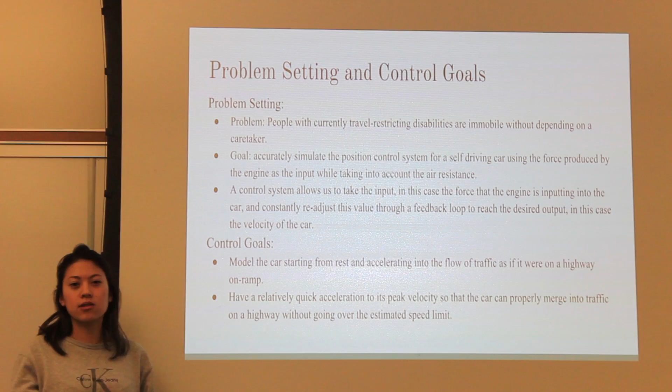So one of our main control goals, as I stated before, was being able to merge onto about highway speed, maybe even going a little bit faster. And so the model of the car, obviously, has to start from rest, because you're not just going to be jumping into a moving car, and it has to accelerate into the flow of traffic as well. So as if it were on a highway on-ramp, because we don't want it going too slow or too fast.

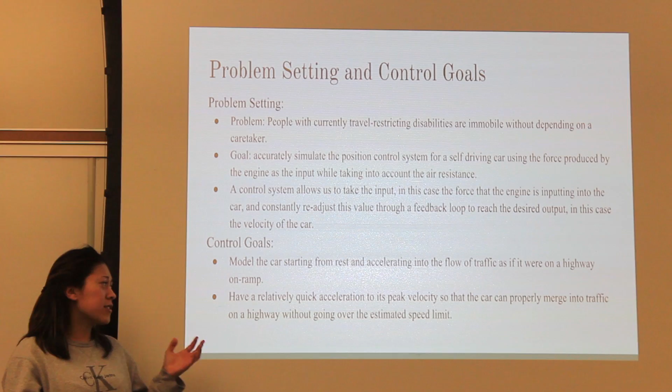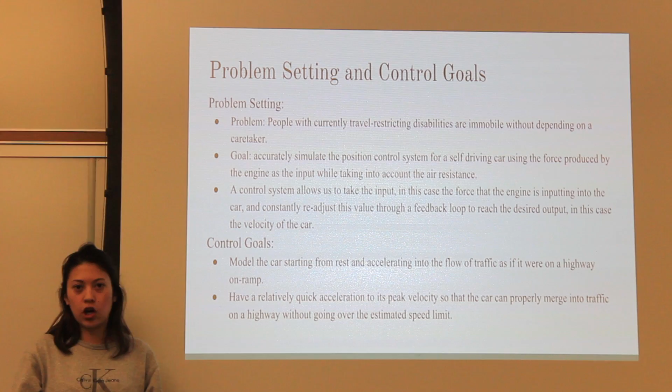We also want that relatively quick acceleration onto its peak velocity, but we don't want it to completely overshoot this velocity because we don't want someone to be in the car and completely out of control about what speed they're going at. So next, Charles is going to be talking about some of our model iterations.

Hi. So to begin our modeling, we took our vehicle and used an impedance network to model it. We ran it through a couple iterations. First iteration, we assumed mass of the vehicle to be 1,000 kilograms, a drag coefficient of 200, and an engine force of only 2,000 newtons.

We ran this through an iteration, and we found that the rise time, basically the time to get up to 60 miles an hour, was just way too slow. It was unsafe and not practical for a car accelerating onto a highway. So we had to go back, make another iteration, and change some of the values.

So what we did, we cut the weight of the car down to 800 kilograms. We made it more aerodynamic, which dropped the drag coefficient to 100, and we increased the power of the engine up to 3,500 newtons. We ran this through an iteration, and these design parameters were able to give us our desired rise time.

But to model the system, we used a transfer function modeling the output position over the input force, multiplied both sides by s in the frequency domain to convert that position to a velocity, which is our output goal. And we ended up with a plant G(s) of 3,500 over 100 plus 800s. And to describe the analysis on this and talk more in depth about the rise time will be Marcello.

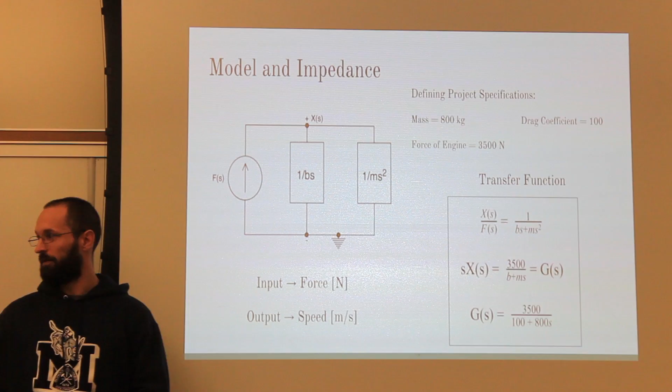So after taking that plant, we plotted the step response, and we found that the vehicle was able to reach a maximum velocity of around 78 miles per hour, which is reasonable. And it reaches our 0 to 60 goal in about 11.5 seconds, which is reasonable given other current models on the market. If you look at a 2012 Toyota Prius, its pickup speed from 0 to 60 is roughly 10 seconds. So we're doing pretty good there.

After this passed the verification stage of, okay, this plant is going to work for what we want to do, we looked to make sure that this plant was stable. And it turns out this only has one open loop pole, and it's in the negative 1/8, which is in the left half plane, making it stable.

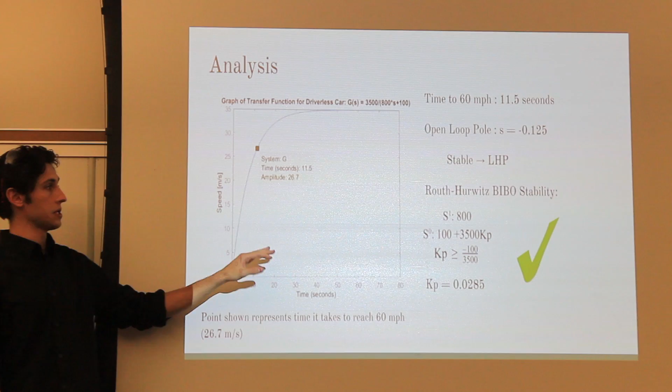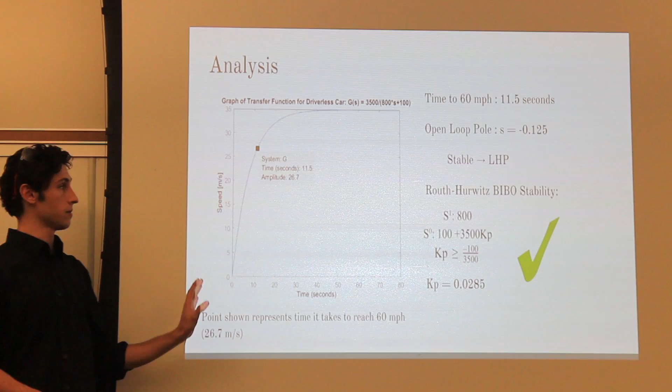In addition to this, we ran a Routh-Hurwitz stability test in order to determine what area of gain we would be able to use. And we were able to determine that any gain above negative 100 over 3,500 would be acceptable. After running through some calculations to determine the best gain possible to achieve our rise time, we determined that a gain of 0.0285 would be acceptable for our model.

So the next step was figuring out which controller would be best for our application, and we determined that a proportional controller would be the best. One, because it's extremely simple. There's no integrator or derivative portion of this, which means fewer parts that could break in the overall project. So that was a huge plus for us.

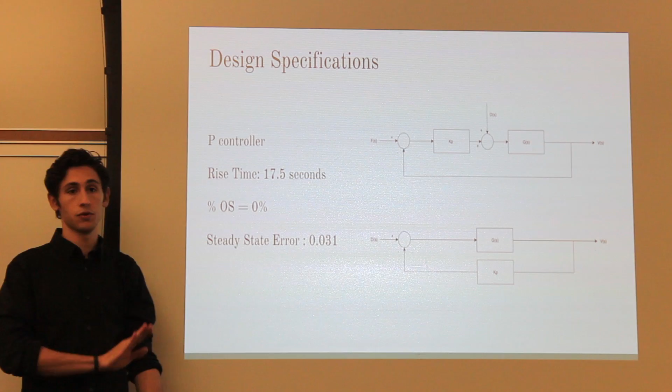In addition to this, we didn't need an integrator, just because this is a first order system, where, as you saw on the previous slide, it has that turkey in the oven shape and it's leveling out. There's no overshoot that we need to correct or error that's really going to get out of control. So our final analysis gave us that we had a rise time of 17.5 seconds, and there is 0% overshoot, again, because it's that first order system. You're not seeing it shoot over and then settle back down.

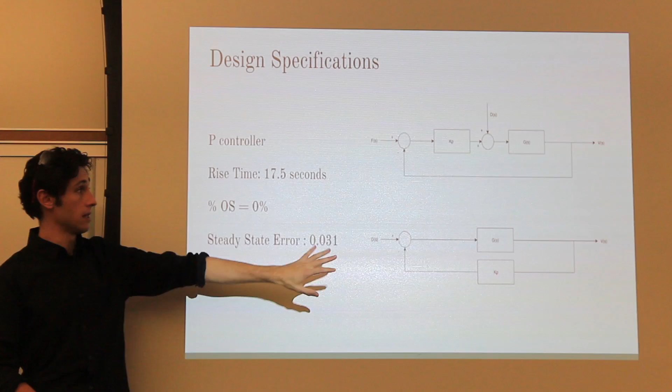Ultimately, this ended up giving us a steady state error of 0.03, and that is a result of disturbance. So if a disturbance is given onto our plant, this proportional controller will help correct that and bring the error down to this value. Next is Lauren to talk about things.

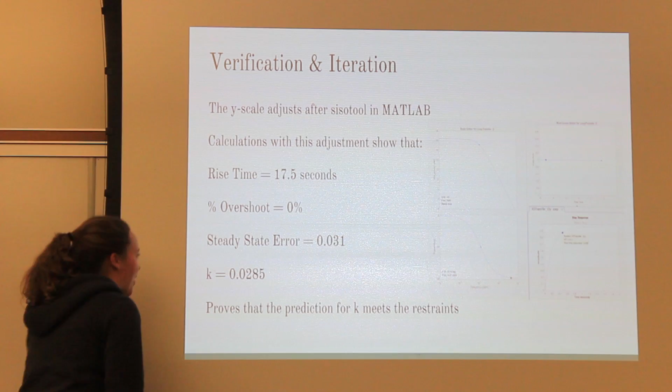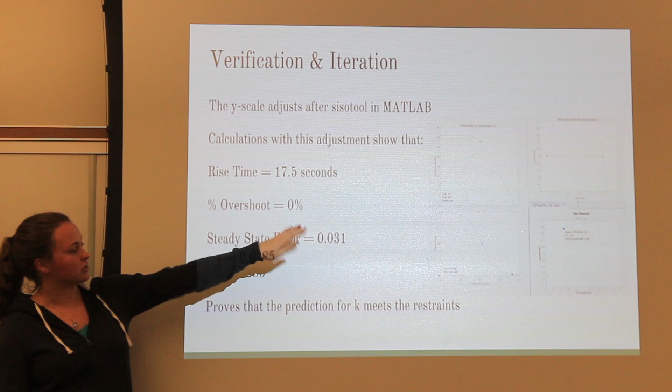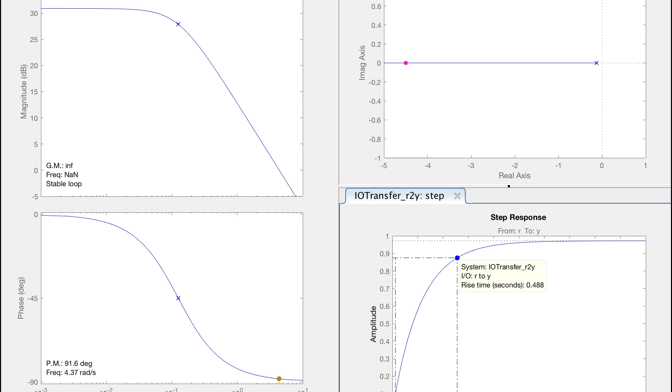I'm going to talk about the verification of our function. So as Marcello said, our rise time was 17.5 seconds, and when we ran our function through the MATLAB sisotool, the results were these 4 graphs on the right. So in the bottom right is the step response, and the rise time is marked by the small blue dot over there. But in both our results and the sisotool, it was 17.5 seconds, which means though the scale of that graph is smaller than one of ours, the results are the same.

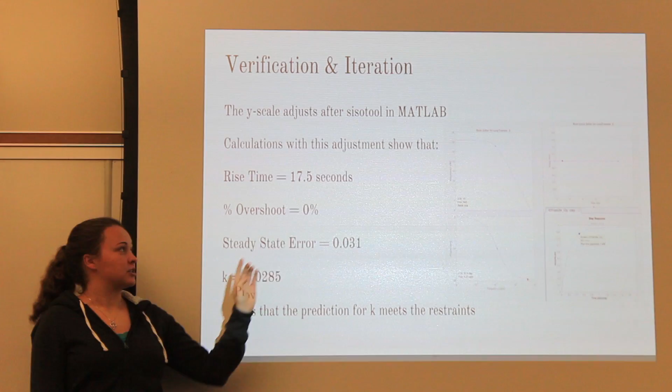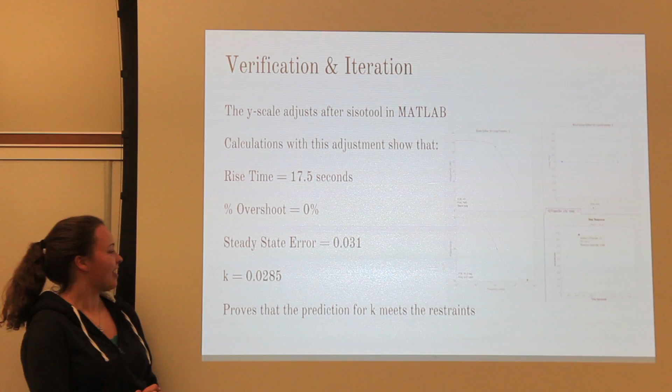So for the percent overshoot, it was 0%, which gives us a zeta value of approximately 0.9, which corresponds to a phase margin on this bottom left graph of 90, which also verifies our results. The steady state error was 0.031, which corresponds to the top left graph over here. And this is the Bode plot, which simply means that there was not a large error between the function and our results. And all of this was based on a k-value of 0.0285, which was our estimate at the beginning, and was multiplied by our G function.

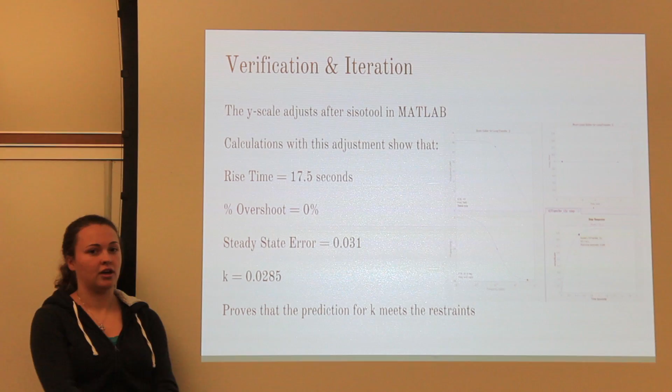So, based on our design, our analysis, and our verification, this is what we believe to be the best choice for our design for our driverless car.